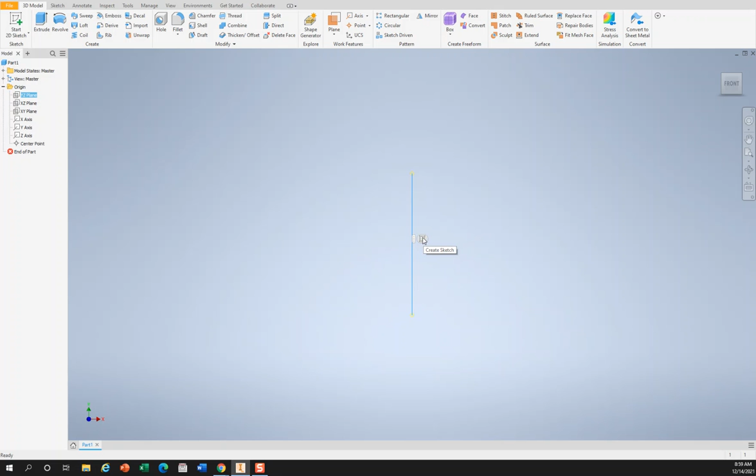I'm going to select the YZ plane, click on it. As soon as I click on it, the icon appears on my screen to create a sketch. This is the standard procedure with Inventor: always you select a plane that you want to work on and then start a sketch.

Okay, so we have the sketch in front of us, and now we need to get some dimensions. This entire clock is about 12 inches diameter. So the stand is going to be perhaps within 6.5 inches, maybe 7 inches.

And the real question is, how are we going to support the stand? When you put the clock on the stand, how are we going to support it? How are we going to rest it and secure it?

So that's the question. And then I realized that the design enabled us to create some extra additional unused axles on the back. So maybe we can use those axles and insert them through the holes of the stand, which would actually keep the clock at a certain angle.

We don't want the clock to be at a 90-degree angle because we're going to look at it probably from different angles other than 90 degrees. So we're going to tilt the clock a little bit, maybe 75 degrees, not 90 necessarily.

Or 85 degrees. And the next question to answer is how wide the base is going to be, because the base is important. If the clock is going to be as high as 12 inches and tilted about 85 degrees, then the base should cover probably around 6 inches, right? That would make sense.

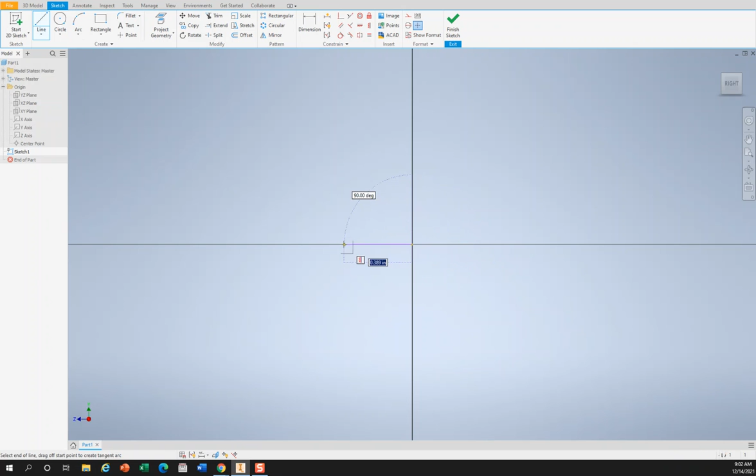Okay, so I'm selecting the line command, and starting a line from right at the center. Maybe I should go to the left this time. I'm going to go to say 6, enter.

And I'm going to just measure the approximate height. It's going to be, an angle is going to be 85 degrees. Maybe let's go with the same 75 degrees.

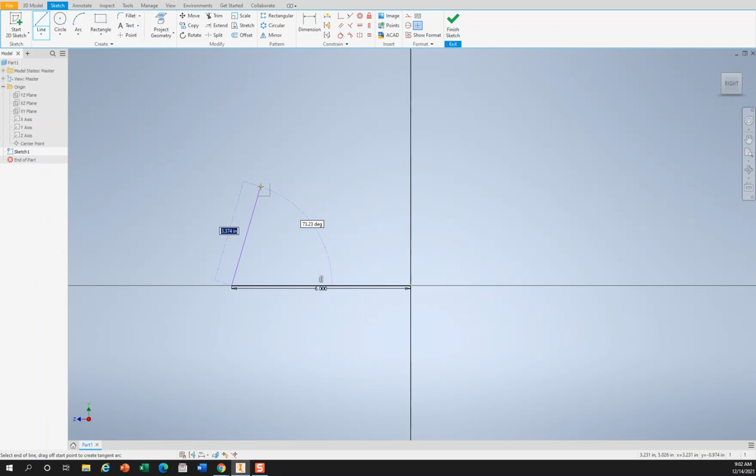And about say, yeah, about 3 inches high. So I'm going to type 3 and tab key, and 75 degrees and enter key.

Now there should be some thickness. I'm going to be creating this thickness after the offset command. First of all, this is a sharp angle. It's not necessarily something that is more aesthetically appealing. So I'm going to change that sharp angle to a rounding. I'm going to use the fillet command.

The fillet should be, say, about 2 inches. I'm going to choose these two lines. Well, this is too much. I'm going to just, perhaps 1 inch. No, we'll do this one more time.

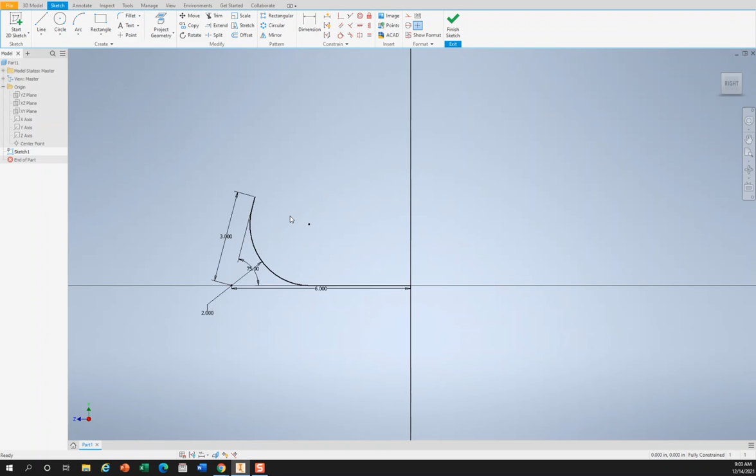Let's try 1 inch with the fillet command, and let's select the item. Yeah, this is about right.

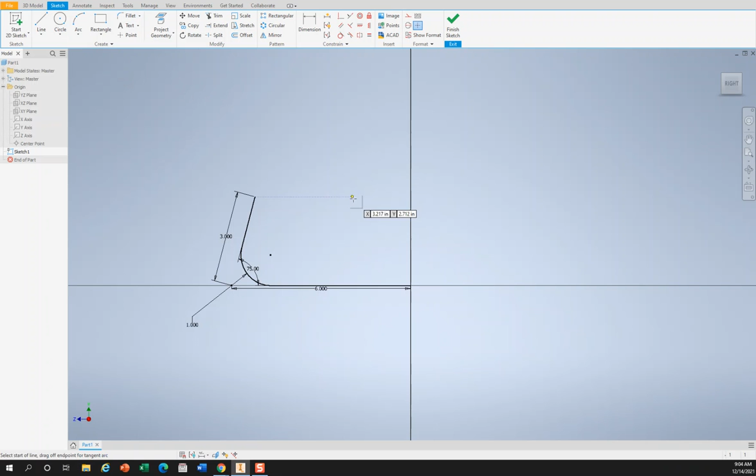And now we're going to draw another line from the top of the line. It's about perpendicular, and about say 1.5 inches or 1 inch. 1 inch is fine, that's right.

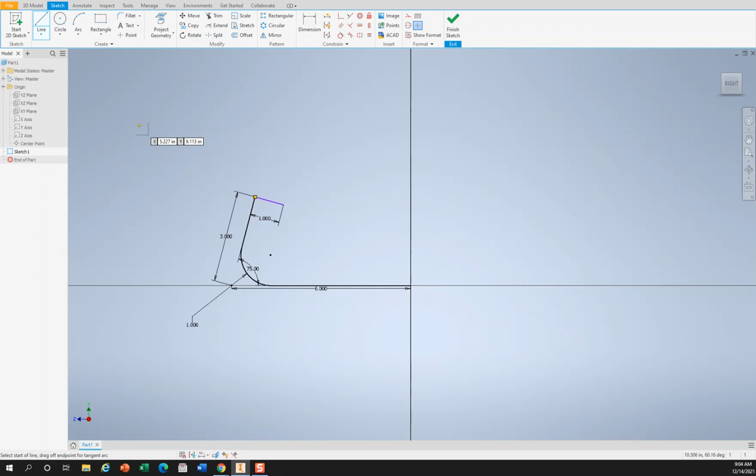Okay, enter. Now we're going to offset this. Let's offset it to 3/16 of an inch. The entire line is being offset at 3/16 of an inch, 3 divided by 16.

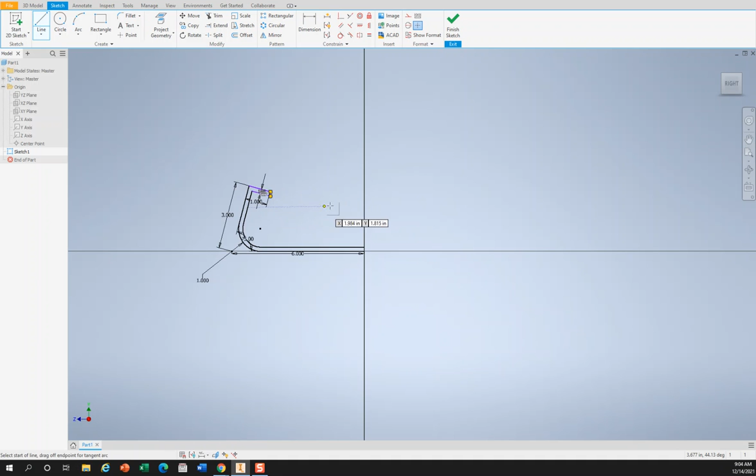Enter. Okay, we need to draw the lines at the end of the closed polyline. Enter, enter. So this will be extruded. Let's extrude the entire thing about 6 inches.

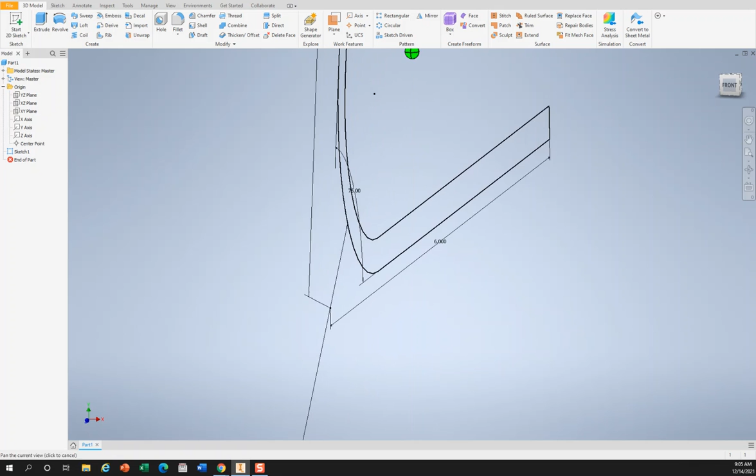And before extrusion starts, I'm going to finish the sketch and then select the extrusion. And I will go with 6 inches.

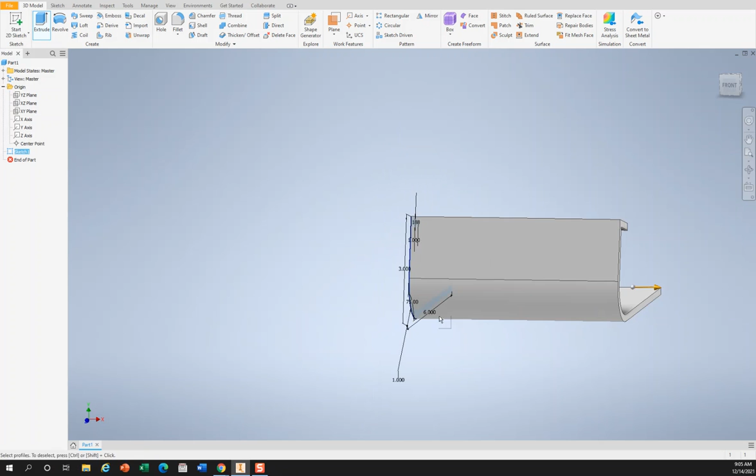Okay, extrusion. When you do things like that, sometimes I want you to be curious about why it's extruding in one way and not the other. What if I wanted to have it extruded in 2 directions?

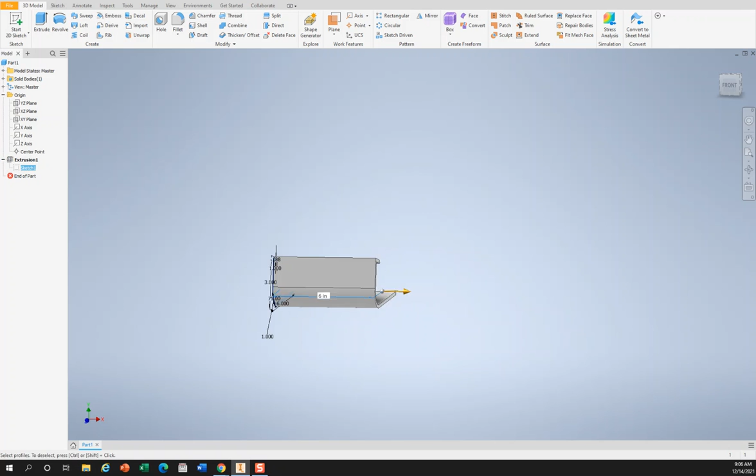Let's enter here and find the extrusion dialog box. I wanted to go with a 2-way extrusion. Okay, there it is. Good.

If you put the entire clock on top of this, it's not going to hold, so we need some holes in the surface, because there are 2 axles and I want to insert those 2 axles through the holes. I already went back to the clock face and measured the distance between the 2 holes, and it's about 3 and a quarter inch.

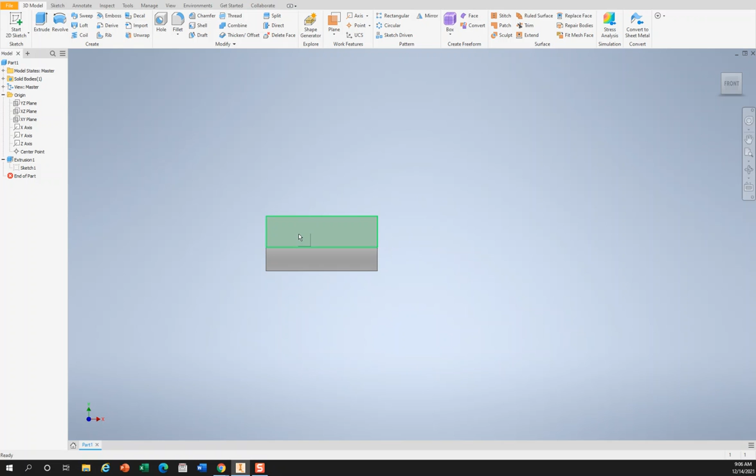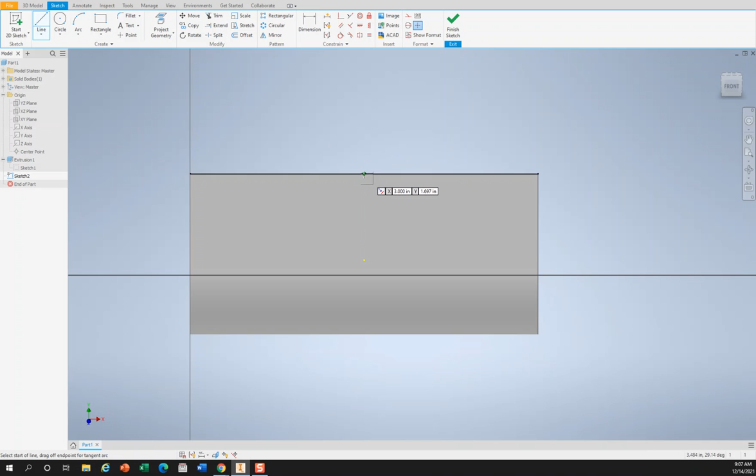I'm selecting the surface that I want to work on and creating a sketch based on the surface. Now I want to draw a line to designate where the center of the surface is. This is approximately where the center is, and I also want to designate the line behind that surface. So now we can create our hole.

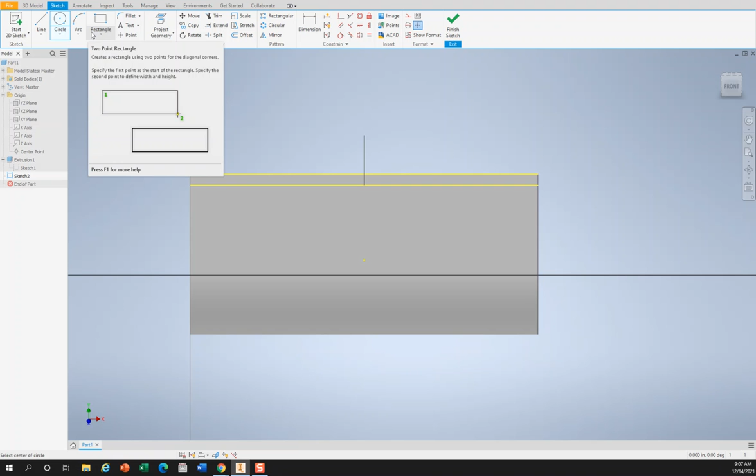The size of the hole should be slightly larger. If memory serves well, I checked it out and the axles are 0.5 inches diameter, so I'm going to make it a little larger, 0.52 inches diameter.

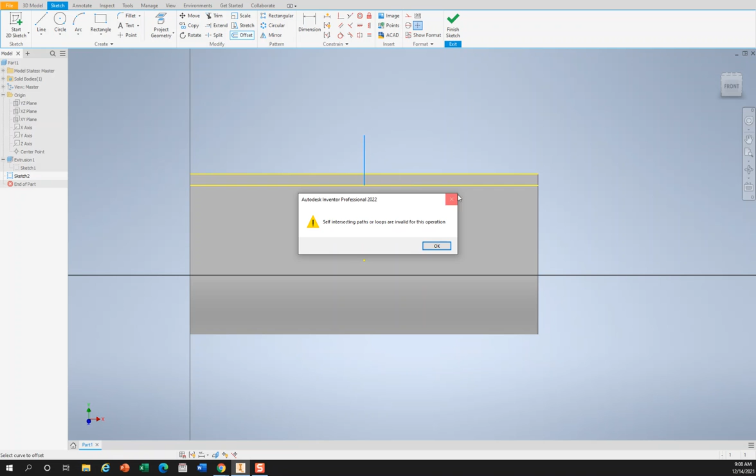So what's the distance? 3.25. I'm going to use the offset command, to the left side, and 3.25 divided by 2. I'll put the math behind that: 3.25 slash 2, enter.

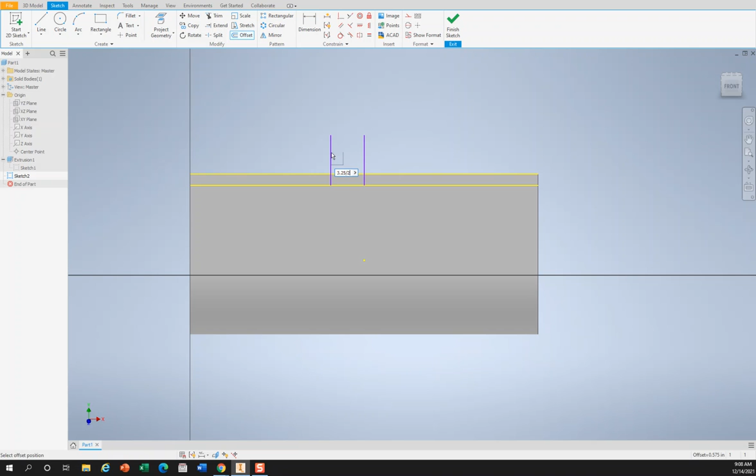And we'll do the same thing again, offset command, 3.25 slash 2. I'm glad that Inventor is capable of doing this math much better.

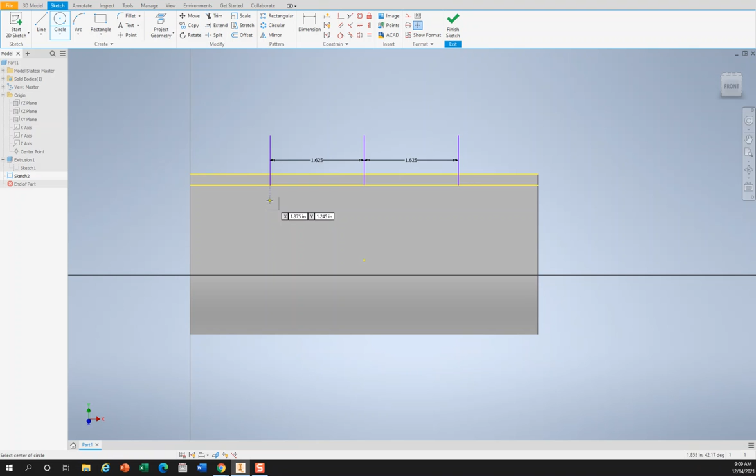And now we need the circle, approximately 0.52 diameter. I'm going to type that, 0.52, enter. This needs to come down a little bit more.

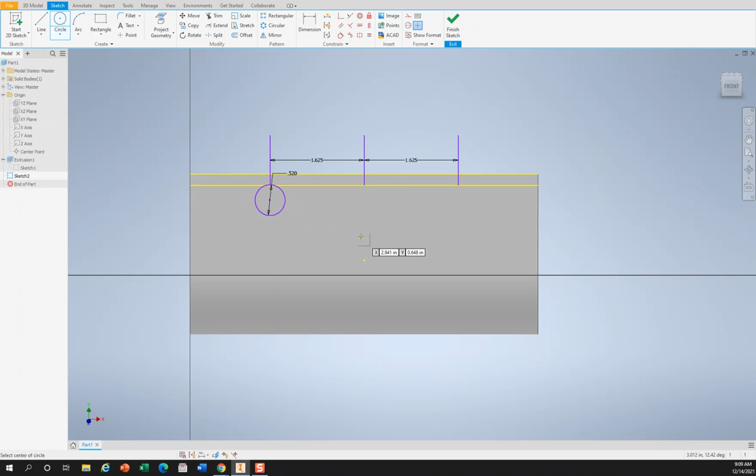So I'm going to use the move command from where it is. There's a move command right here. Okay, come down a little bit below where it is.

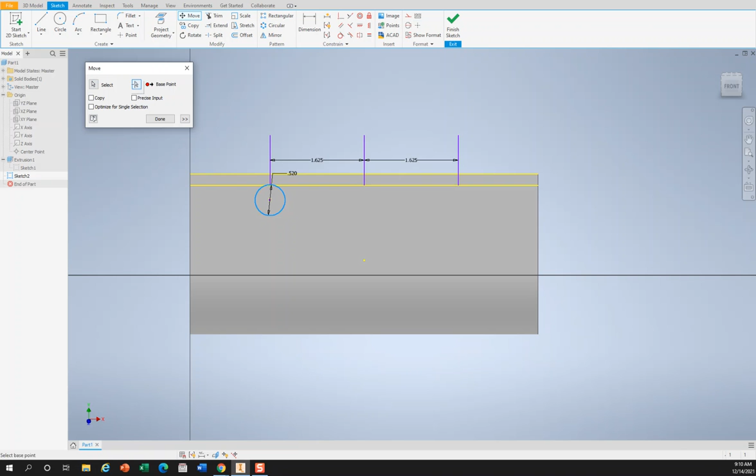A general rule of thumb with any software is that if something doesn't work the first time, you try it again until it works, if you're sure that you're doing everything right.

So we're going to make a copy. This circle is going to be the hole from here, copy this circle, and from the end of the line to the end of the line. All right, so we are ready to extrude this.

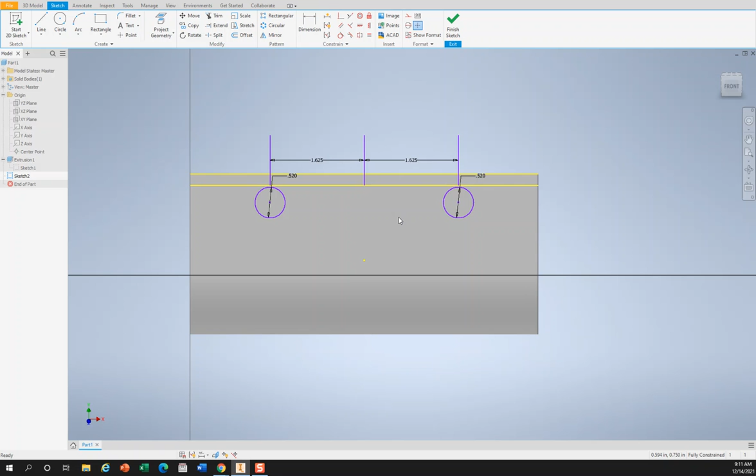Just to make sure these are the correct hole sizes, it looks a little too large to me, so I'm going to go back to the part drawing and check it out one more time. But basically, this is the design and the extrusion.

We're going to finish the sketch, go back to extrusion, and select the cut type of extrusion. We're going to click inside each one of those circles, because it's a cut, created perpendicularly, and now we're going to OK it.

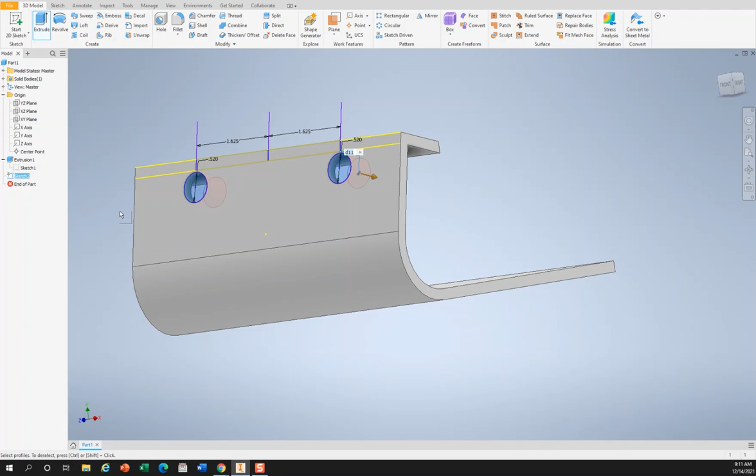Okay, and we need to save it properly. So this is right now in front of us, the back face of the assembly drawing.

I checked it out, the diameter of each one of those axles is 0.5, half inch exactly, and it's marked this way, you can see it yourselves. The distances are also measured accurately between the two centers, 3.25, and this is correct—they measured it earlier too. So I think we're ready.

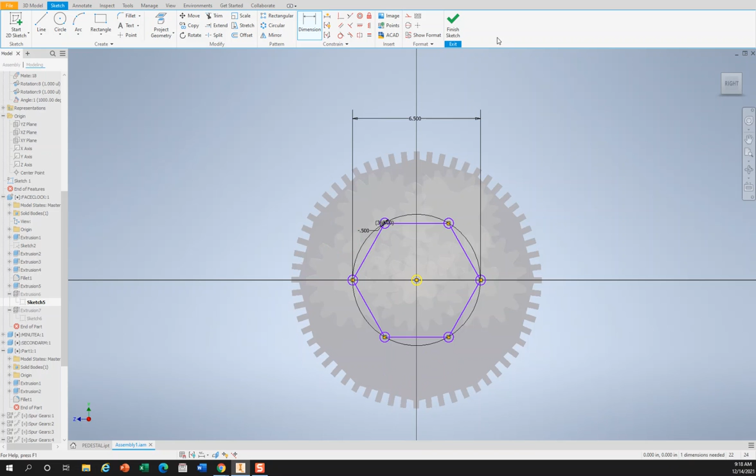I'm going to finish the sketch, and we're going to insert the stand over here. Before we do that, I'm going to just change the angle a little bit. This is the assembly drawing, so we can just simply place it.

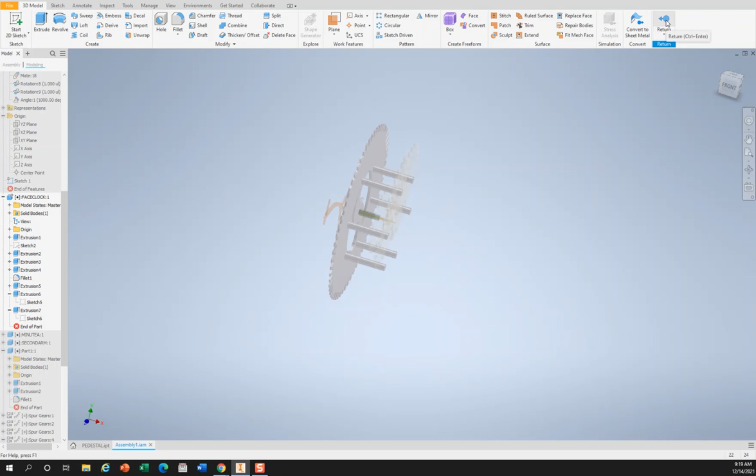So I'm going to return back to the assembly drawing on the top right hand corner, and click on the Place command to place the stand, the pedestal.

Google Drive, whether it's on or off, there are two important things. We're going to have to keep the Google Drive on if we need the files from Google Drive, not from OneDrive or any other drive. So that's what I did, and now I'm going to insert the pedestal drawing.

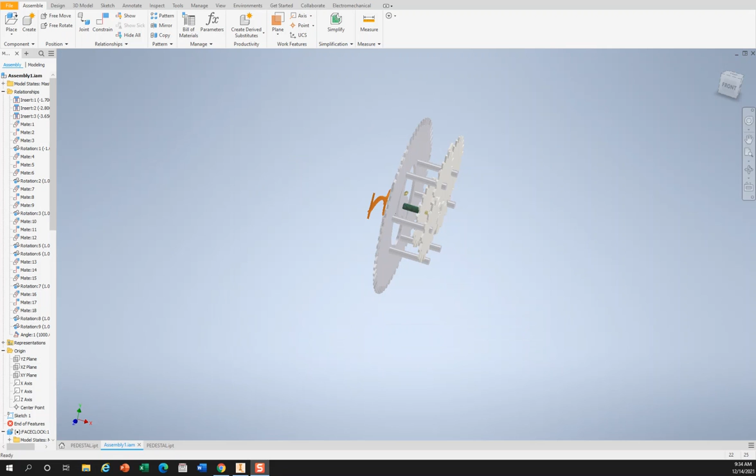Okay, so I'm going to stop this pedestal design here at this point. I suggest you design and build your own pedestal—you can make it look like mine, or you can originate your own. Then at the end, we're going to attempt to assemble all the parts together again in an assembly drawing, including the pedestal. So have a great time.